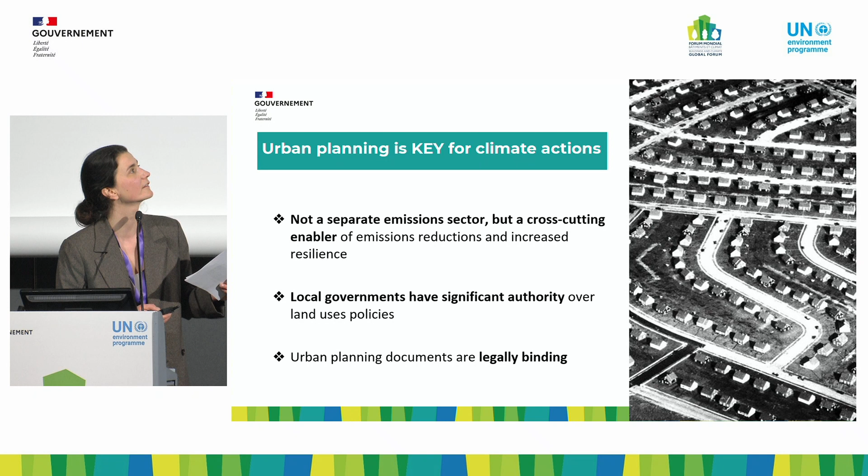I forgot to pass the slide. I don't think it worked actually.

As well as the characteristics of the building. So, for example, compact cities will de facto reduce the energy use of buildings and the embodied emissions from construction. There is a recent study from RMI that shows the impact on carbon emissions from this type of policies.

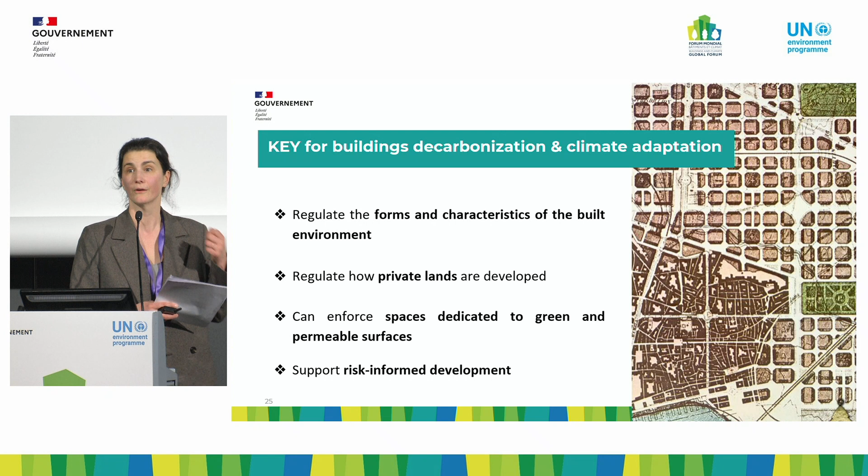Another example, we know that cities are made of approximately 30 to 40% of

I'm not good with slides today. Sorry, whatever.

30% of public space, and the rest is mostly privately owned land. So, of course, when we need to develop nature-based solutions and increase climate resilience, it's not possible to focus only on public space and open space. It is also very important that we regulate private development so they can also contribute to the important effort on nature-based solutions and climate adaptation.

Finally, we know that today, 90% of urban expansion in the global north and global south is happening in climate risk zones or near climate risk zones. So it is absolutely essential that cities and local governments get the spatial climate risk data that they need to take informed decisions when they are revising their urban planning policies and their master plans. So urban planning is key for climate action, key for building emissions, key for climate resilience.

And we know that the way we have planned our cities since the past century, since after World War II, is no longer working for the world. It promotes urban sprawl, low density development, and an over-specialization of land use and neighborhoods. It also promotes unsustainable building form and building characteristics. So it is urgent to change the way we plan our cities and to integrate carbon objectives, especially on buildings, and climate resilience.

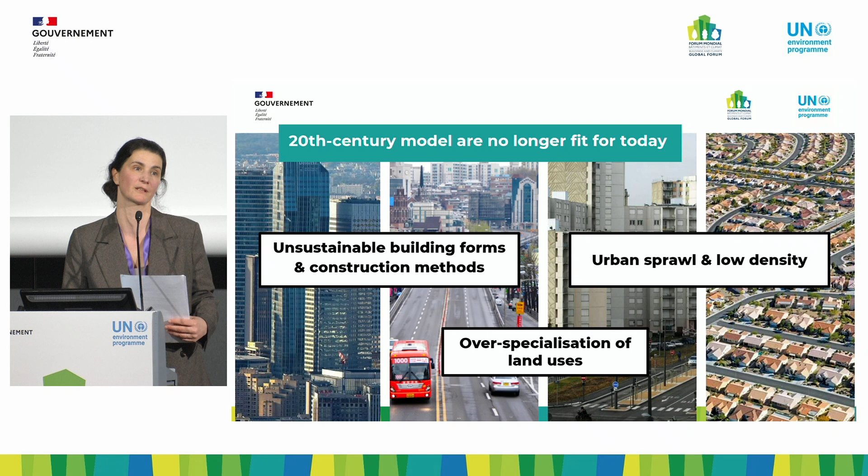So to open, our session today will be organized mainly around two panels. One about land use policies to decarbonize buildings, and the second panel about land use policies to accelerate climate resilience. Then we'll conclude our session with remarks from the representatives of France and UNEP, who will state the call for action that we have prepared with the organizations organizing this session: C40, where I'm the director of urban planning, as well as UN Habitat, UNEP,

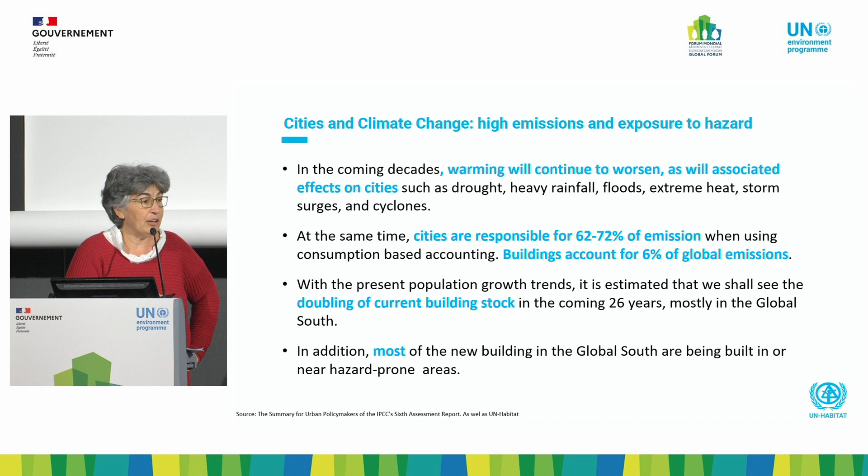Yes, just as a context, and I think Hélène has already mentioned some of these trends and issues related to both the hazard and increasing impact of climate on cities, but also the demographic trends that are making us face an exponential growth, not only of urban population, but of the space and the buildings that are requested to host them decently within cities, and also fundamentally the lack of good and well-organized planning and design of the cities, particularly in the global south.

I don't know where I have to. Yeah. Yes, it's a bit confusing.

So we are facing huge challenges, and we need a significant shift in urban planning. So it's not just a matter of putting urban planning in the center a little bit more when we talk about decarbonization and adaptation of cities and also of buildings, but also to be able to leverage adequate urban planning and design as an integrating tool, as well as system thinking that allows us to bring together different elements of influence on the built environment and the behaviors of residents and urban dwellers.

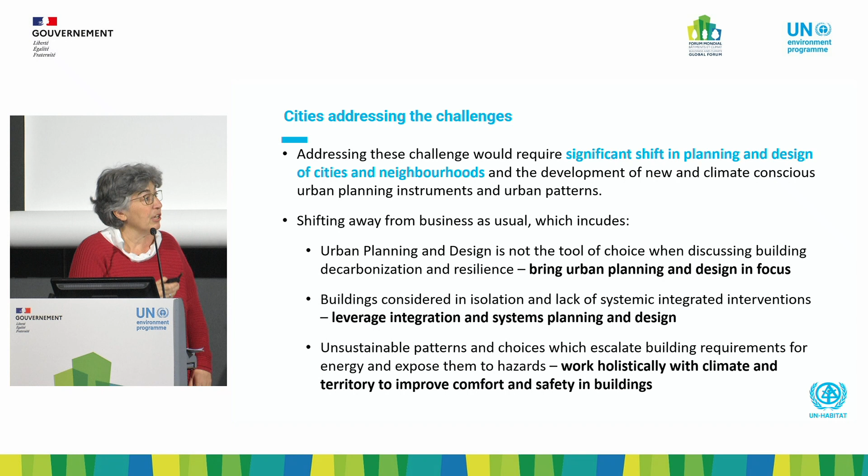And finally, we need to have a territorial and climate specific approach so that the conditions within even buildings are better influenced by the way we design and organize the space around them, at the neighborhood level mainly. So I just want to go through very rapidly what are the issues that we face and that we need to consider.

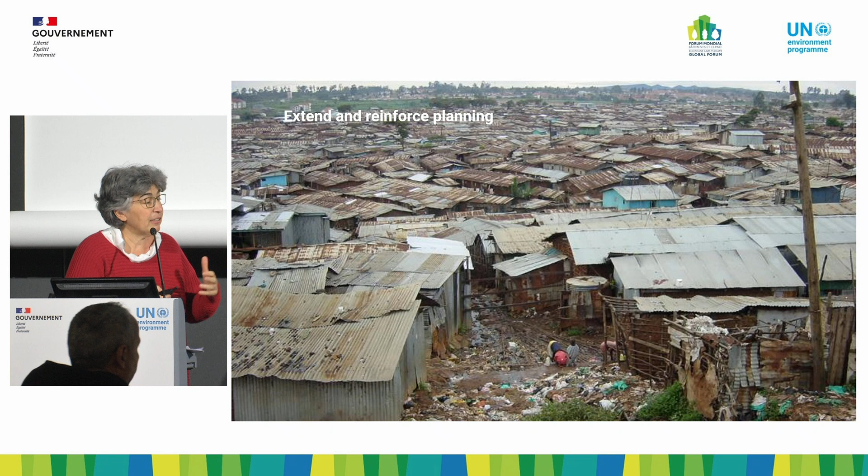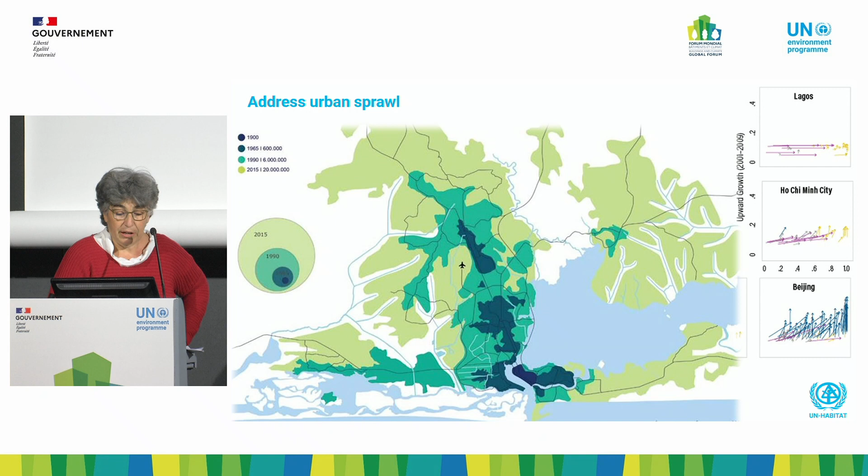First of all, urban planning and design tools and instruments are not extensively used and able to be implemented in many cities. This is an African informal settlement. So we need to extend the use and enforce the capacity. We need to address urban sprawl. It has been mentioned, but the growth of urban land uses is largely more than proportional to the growth of population, with a very horizontal expansion of many cities, and very few cities globally are actually expanding vertically. These are WRI studies, and the picture is from Lagos.

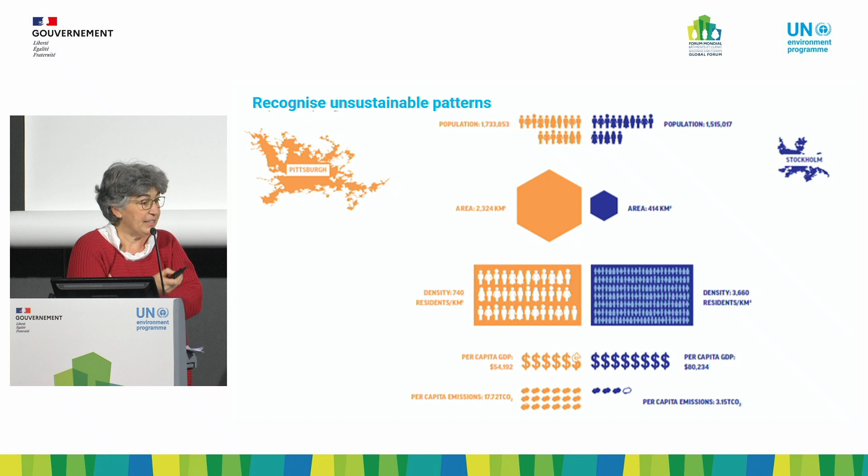We also have to recognize that certain patterns are less sustainable than others, and they have an embedded consumption of energy and request for carbon emission that is very specific to the patterns, particularly when we have low density and distributed settlements. We have here the comparison between Pittsburgh and Stockholm with similar GDP, actually even higher GDP in Stockholm; the amount of emission directly influenced by the actual pattern of low density in the city is quite striking.

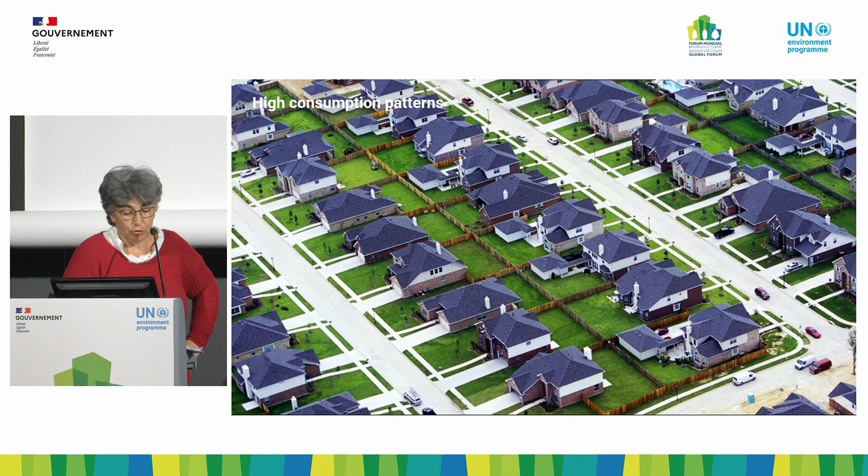This is also because we are not talking only about sprawl in poor cities or in low-income global south cities. We are also talking of high consumption patterns of sprawl, in particular in developed countries, where the preference often for single dwellings, etc., has a huge energy demand on top of, of course, land consumption demand, and this is just illustrative. So what about medium density and complex neighborhoods?

These are the patterns that have demonstrated the best outcome in terms of energy efficiency, both for the build but also for the overall use of energy for the functioning of these patterns. They support walkable cities and neighborhoods through mixed use and the proximity of functions, etc. But they also create a microclimate. And in particular, I wanted to mention the importance of deploying urban design tools and solutions, which improve the quality of the microclimate and mitigate, for instance, many of the requirements for cooling or warming within the buildings.

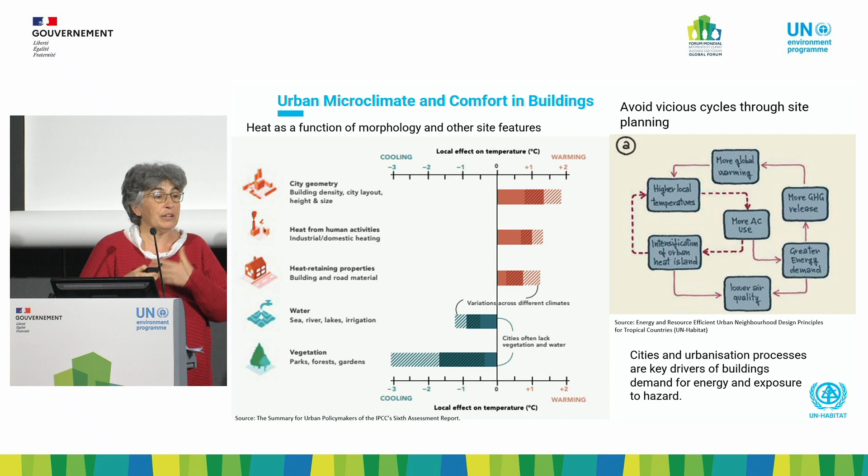Finally, there are quite a lot of studies on the vicious cycle of wrong design of neighborhoods, buildings and settlements in general, where the morphology and other site features have an important impact on local temperature, and all the discussion on the urban heat islands and how to mitigate them. And the example on the other side is the vicious cycle of using air conditioning and not being able to create more bioclimatic solutions. So at the neighborhood level, at the scale of the site, urban design is also particularly important. So not only urban planning, but also a more detailed design at the site level.

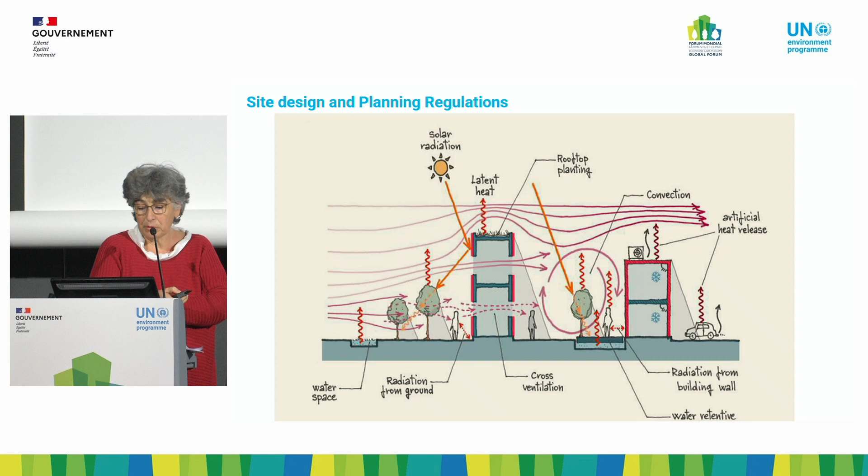And this is also very relevant for the planning regulation and the development regulation, the street patterns, the relation between the building and the open space that has been also mentioned. So do we have good planning and design that we can consider smart from a point of view of climate? I think what we have been working on as UN-Habitat and also the international community has been to promote what we call planning for a sustainable city, which works to revert urban sprawl to compactness, reduce segregation towards integration, and works against congestion through connectivity.

We have a number of tools globally which are being adopted also by member states to help us in this transition. I wanted to mention just a few. The international guidelines on urban and territorial planning, they are also mentioned in the New Urban Agenda as a reference for improving planning systems.

And this is referring to my first point on the need for stronger planning systems and better capacity. We, as UN Habitat, developed the five principles of sustainable neighborhood, which are about mixed land use, social mix, adequate density, limited land use specialization, and translated them into My Neighborhood guidance, which also looks at them in an integrated way, how they can support at different scales livable cities that are compact and connected.

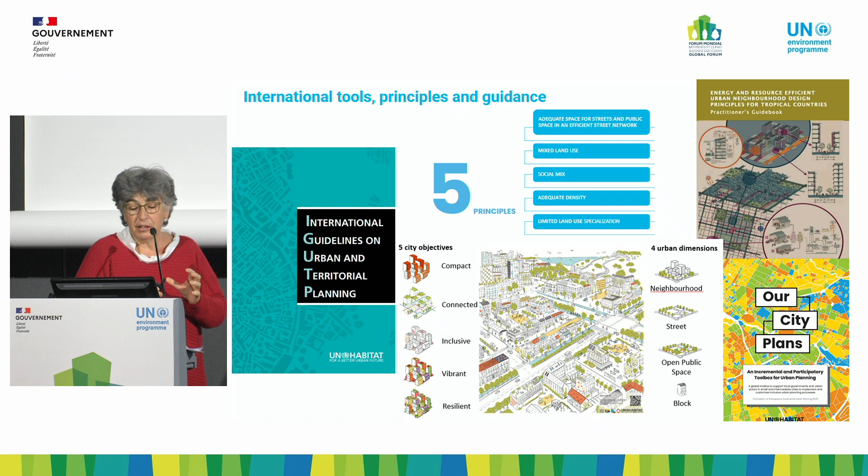And finally, we have worked on energy and resource-efficient urban neighborhood design principles, which go very much into the details of what needs to be done at the scale of the neighborhood on energy efficiency and resource efficiency. And everything needs to come together into planning that is actually recognized within municipal frameworks, and we have tried to develop support to that process through Our City Plans.

So I just talked about UN Habitat, but this is not an effort that is only, sorry, it's here. It's not only UN Habitat. Many organizations, cities, associations, and initiatives are active in this field. There is a wealth of knowledge, as has been mentioned, some research and practical experience.

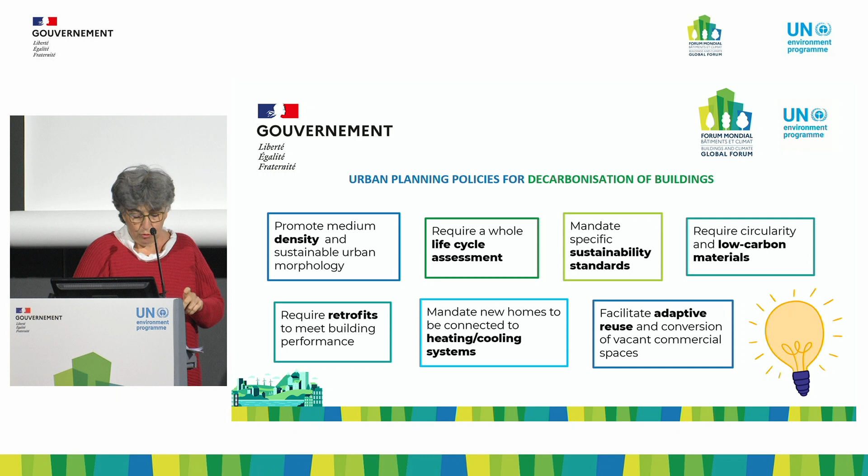But what we need now is actually translating this into a flow of resources, first of all, to cities, and capacities that enable them to be applied and reach out actually to the cities of the developing world, which absolutely need, given the patterns and the speed of their urban expansion, access to good practices and resources to be able to deal with these things. So I want to acknowledge all the partners that over time have been working on these issues.

Many will speak today, and also mention that this conversation moves from COP28, where we were actually discussing these issues as well, to some extent, decarbonisation through planning. We hope to influence the report on cities of the IPCC, which is a very important milestone for this conversation. And of course, COP28, 29 and 30 will be very important appointments for this community to continue this conversation. And I hope the discussion today will bring in even more inspiration and good practices in this direction. Thank you very much.

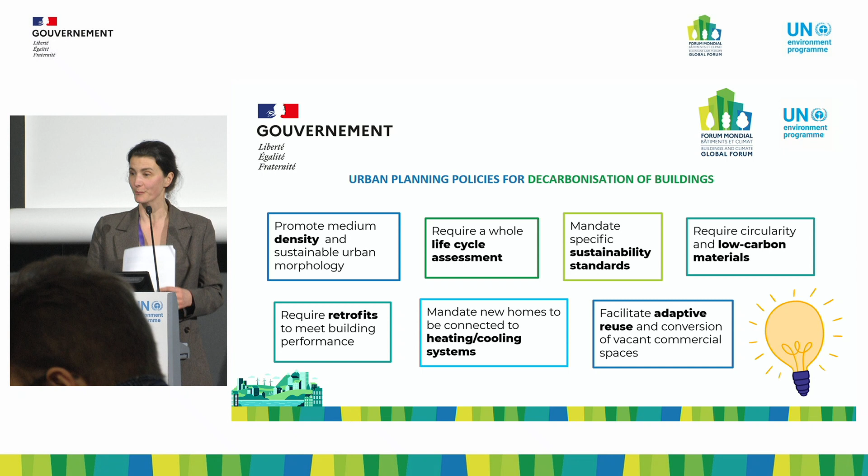Thank you very much, Laura. And actually, it's a fantastic transition to the panel and to the discussion we will try to have now. It's about how we make it happen. All the transformation, we know what needs to be done, how we make it happen. And let me maybe introduce the first panel. So we'll discuss land use policies for decarbonisation of buildings with a few examples of policies that cities have taken to reduce their emissions.

First, Portland in Oregon. The metropolitan area of Portland has just passed a new regulation that sets urban growth boundaries. And at the same time, the city has totally reversed its residential policies that had been developing urban sprawl and developed some facilities for infill policies and smaller housing units. Another example is the city of Vancouver, and the former mayor of Vancouver, who has been pushing this agenda, is in the room now, so I wanted to pay tribute. They have really included in their land use policies the need for integrating and submitting a whole life cycle assessment while developing their building permits.

The City of London has recently integrated in their land use policies facilitation and incentives for conversion of vacant offices and commercial space into housing. They have also identified areas where every new building needs to be connected to a communal heating and cooling system. And finally, the city of Medellin in Colombia has integrated a sustainable construction manual in the city's land use plan that provides advice, but also fiscal support for developers that apply circularity principles and low carbon materials. So these are just a few examples.

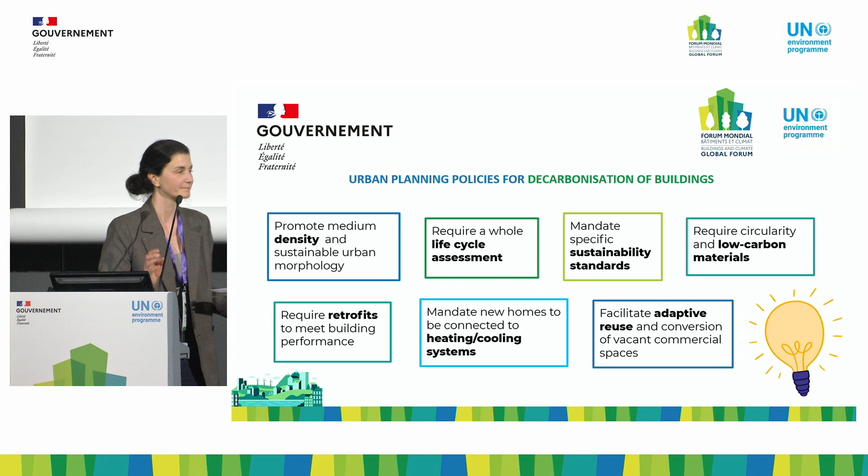Now let's dig a little bit more into the detail, and I'm happy to invite on stage Stéphane Leclerc, who is the director of urban planning of the city of Paris, Monica Conrad, who is the deputy director of the urban planning department of the city of Warsaw, Kelly Alvarez Doran, senior fellow at Architecture 2030, co-founder of Climate Design and professor at the University of Toronto, and Christian Hernandez, who is a member of the Executive Leadership Council of Urban Partners and Managing Partner at 2050. And actually, I think I will join you.

And Kelly, does that work?

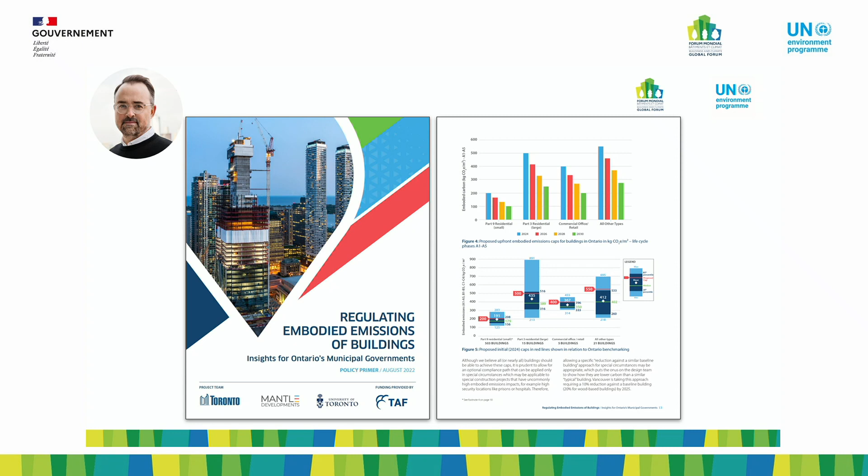Yes. So Kelly, my first question is actually for you. So you have been working closely with the City of Toronto to help them with their building decarbonisation strategy. You are co-author of the North American first embodied carbon target for cities. So could you please share with us a little bit how the urban planning policy of the City of Toronto has impacted embodied emissions and building emissions in the city, and maybe share with us some of the recommendations that you are actually discussing with them for the next amendment of their land use policies.

Absolutely, thank you, and great to follow Laura. So I'm a Canadian architect. I come from the highest GDP emissions per capita of G20 nations, and a lot of it has to do with our built environment. I'm co-author of this policy, the City of Toronto, the first, following Vancouver's footsteps, first city in North America with maximum targets. You can see we did an extensive benchmarking of building types to set these targets, and these targets will step down over the decade.

But in developing this, with the research that I've been leading at the University of Toronto, when you start digging into what does 500 kilograms per square meter really mean, you have to look deeper into buildings to understand where emissions live. And so here's an illustration of where the emissions live across residential structures in Toronto. You can see in low-rise stick frame construction, the majority is in the foundations. Even in the mid-rise and tall buildings, up to 50% of a building's emissions could be below grade, or I like to say our buildings are icebergs.

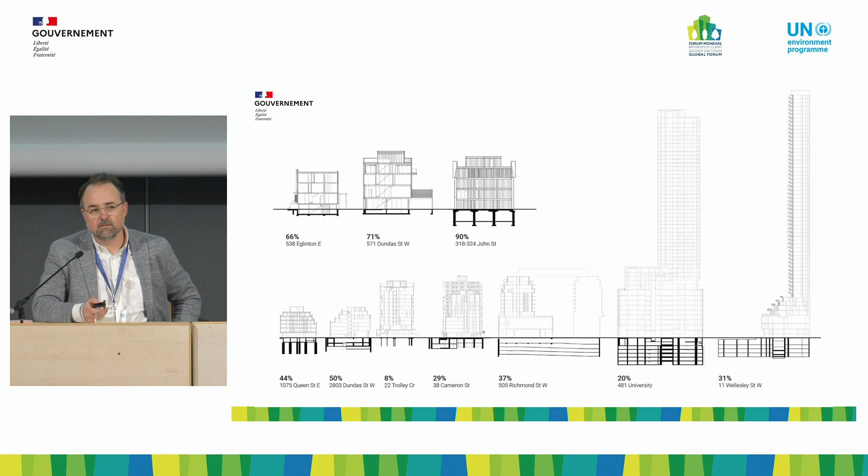And the question is why? Why is this happening? Well, there's primarily two reasons that are planning policies. I've come to understand that in Toronto, like much of North America, architects don't design buildings, planners do. And planning bylaw designs buildings, specifically the language in how we regulate what we can build. And so in the City of Toronto, there's exceptions, like these two that I've underlined, that are across North America and the world, which make building basements essentially a loophole in planning policy.

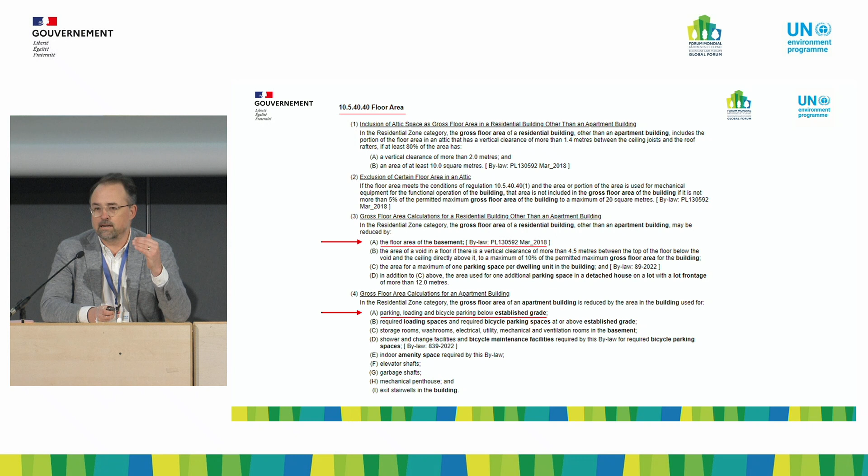So what the city is saying here is that you can build a basement because it's an exception in your coverage in any low-rise construction. And then if you're doing mid and tall buildings, we've got minimum parking requirements for you to fulfill. But don't worry, you can put them underground. We, urban design and planning, would prefer that parking is out of sight, out of mind. And so you see these incredibly deep holes that we fill cars with that are incredibly carbon intensive. And this is all the product of planning bylaw, planning language.

Now, after that, I'm currently working with the city to review the urban design guidelines for mid, tall, and low buildings. Many cities have these, basically very prescriptive means of how they describe new buildings. So this is evidence of the mid-rise guidelines, and what you can see here on the left are these angular planes, again, not unique to Toronto, worldwide. You see this phenomenon, these rear transition planes. First they wanted to ask, what would happen if we changed the dimensions around rear transition planes? And so we did case studies of real buildings.

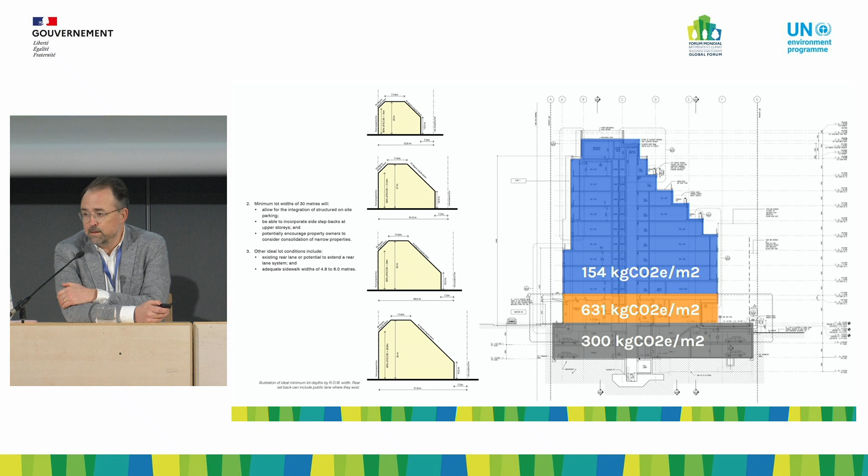So you can see here is a mid-rise housing building in Toronto, and you can see the allocation of embodied carbon across the section of the building. I'd ask, are we building parking or are we building housing? And we did these counterfactual studies. So if you went from a condition of this kind of wedding cake as a product of the setbacks to simpler forms, you can see that even controlling for reinforced concrete, there's big reductions.

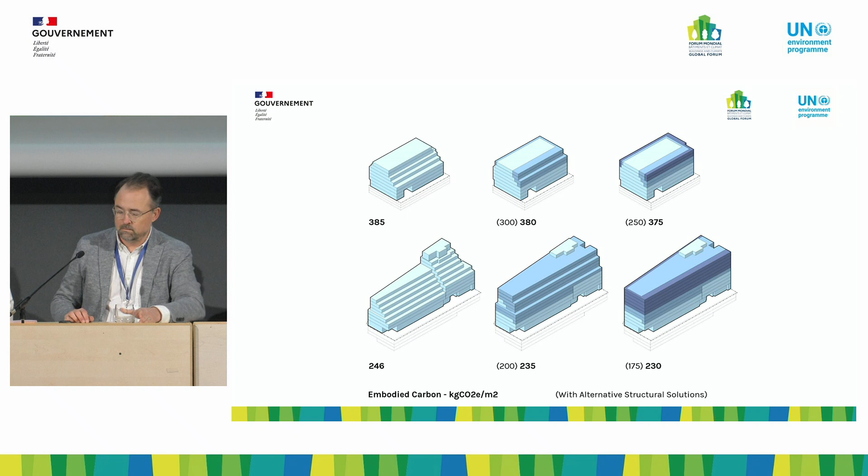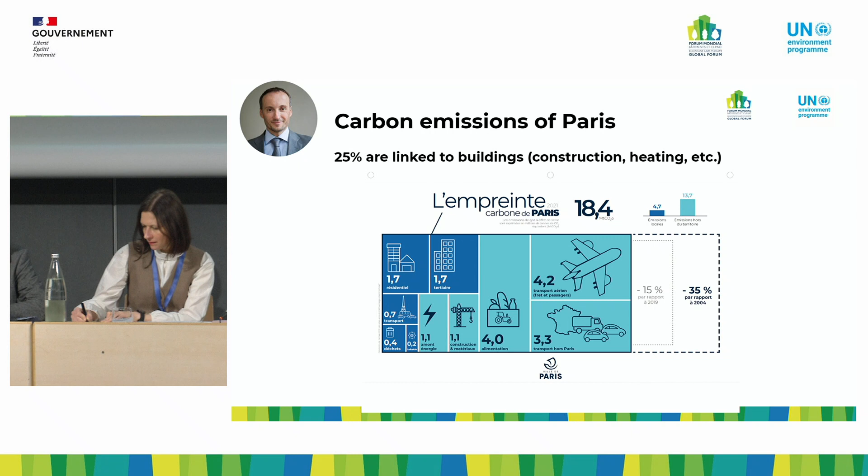And I think your point about the importance of the underground level and how they consume embodied emission was very, very important. I now turn over to Stéphane Leclerc. Paris is currently finalizing its new bioclimatic PLU, the French master plan, and how you have used this important document to integrate innovative new policies to tackle building emission. Could you please share a few ideas with us?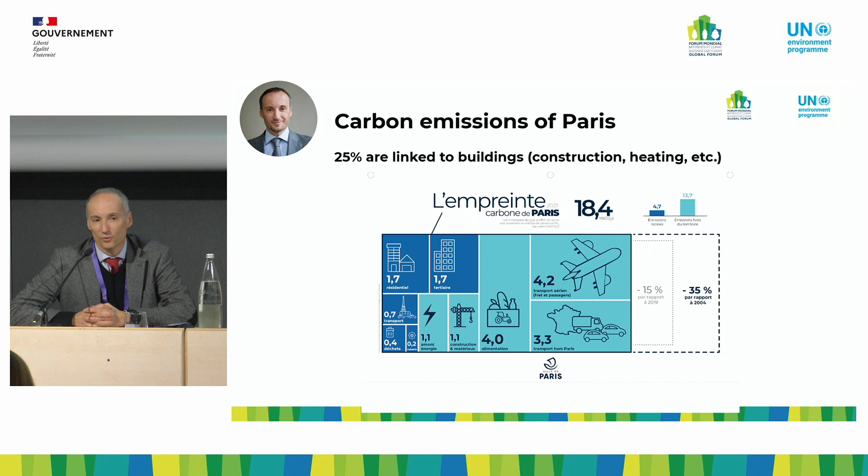Here you see the way we've already gone in Paris for a few years and the target. The target is very clear. It's the same for most cities in the world, most countries. It's carbon neutrality by 2050. And you see that we've made progress. A part of this progress comes from the mobility sector. You have perhaps noticed, if you just had a look at the streets of Paris, the real revolution that we have gone through the past years with, for example, bicycles.

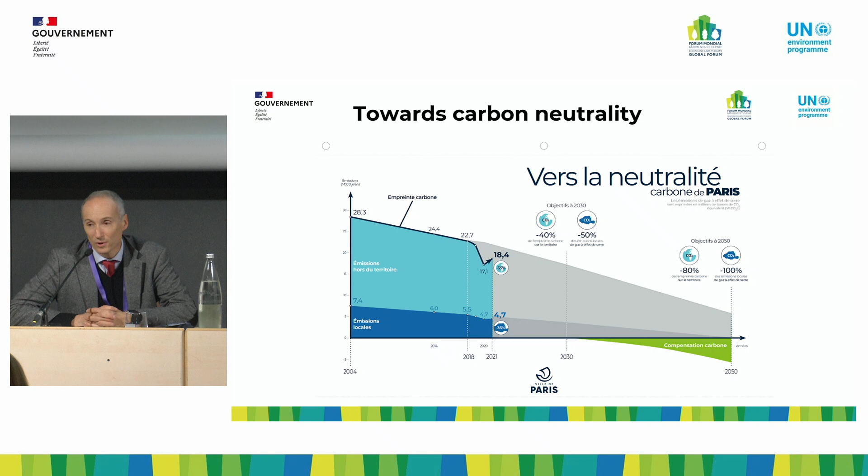We've more than doubled the number of bicycles in the streets of Paris. This is a result of a very ambitious policy to build bike lanes everywhere in the city to provide security for bicycles. We have a major public transport network which is very efficient, so that few people have the need to take their car in Paris. So this is one of the components, but we also tackle the issue of buildings, and you will see how we do that. The tool for that is, as Hélène mentioned, the bioclimatic master plan.

We have at the moment a land use plan in Paris, which dates back to 2006, and the mayor of Paris, Anne Hidalgo, wanted us to revise this document so that we set an international example of how a big, attractive, dense city such as Paris can show the way and be at the level of what the Paris Agreement of 2015, COP21, set to drastically reduce carbon emissions. So how do we do this in Paris, which is already a nearly totally built, very mineral city?

The first key strategy is to change the paradigm of a land use plan. Usually, a land use plan defines how you can build. In the future, in Paris, we will build very, very little. The main aim is to do with the existing buildings, to see how we can transform them, to avoid demolition. Demolition is very intensive in terms of carbon, and to transform the buildings so that they can have new lives without having to spend a lot of carbon. I will show a few illustrations after that.

The second key element is to accelerate the thermal insulation of existing buildings. Depending on the periods when the buildings were constructed, their thermal efficiency can be very different. We have what we call in French passoire thermique. I don't know how you would define this in English, but buildings where the heat goes through the walls and the cold comes from the exterior. So we have to be much more ambitious, to go much quicker.

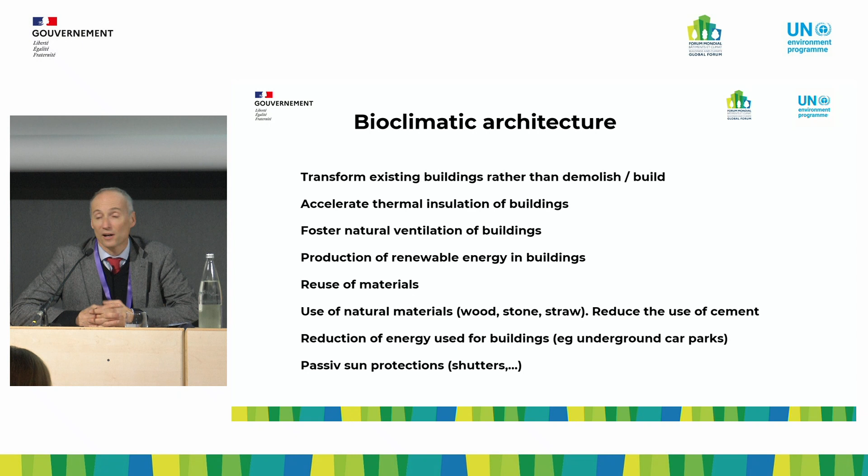And lastly, we have to reinvent some old traditional techniques which were used in the past. So, for example, shutters on buildings. There is nothing more efficient to prevent you from heating than preventing the sun from going into the building through the window. So this is something very archaic, but it's very efficient. It's much more efficient than having air conditioning, which uses energy as well. So all that is at the heart of the new bioclimatic urban plan.

A few illustrations to finish. As I mentioned, the new paradigm: don't demolish, don't build. Do with what exists. Most buildings, if they are built in a proper way, can have centuries of life. Maybe some of them millennia of life. We still have Greek temples in Greece, so why don't we have buildings that we built for centuries in front of us? These buildings can have several lives. They can have accommodation, and then in the future they can welcome, I don't know, shops. They can have doctors' offices, etc.

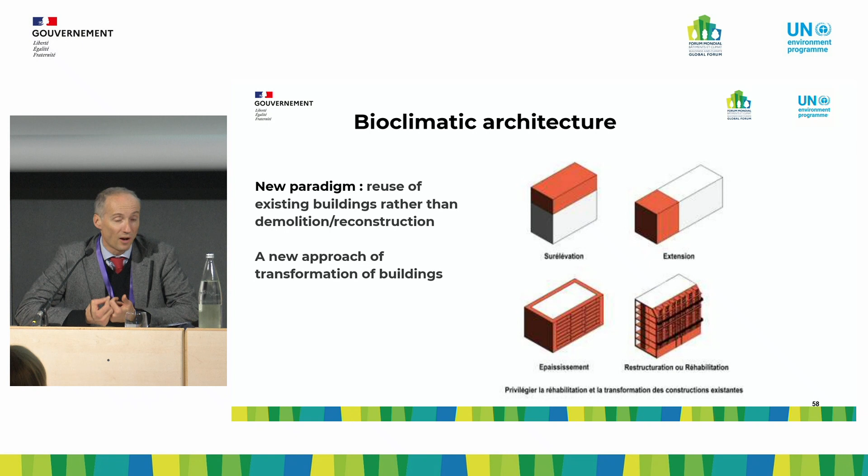You have to think of key rules to achieve that. How do you transform the buildings? For example, we can raise their number of stories. We can elevate them. You can extend them. You can add some exterior extensions to provide, for example, balconies, which are very pleasant for the people living in buildings to have a little place outside of their home, which is very important when you live in dense areas such as Paris, where you don't have a garden. So all these tools are very easy to implement, provided that you have the political ambition to do that.

It's easier to transform buildings which are transformable, of course. That leads to the question of reversibility of buildings. We know that some construction techniques are easier to transform. That's the question of post and beam framework instead of concrete walls, which are very difficult to transform. So the more the buildings are reversible, transformable, the longer they can live, and the less energy you have to spend to transform them.

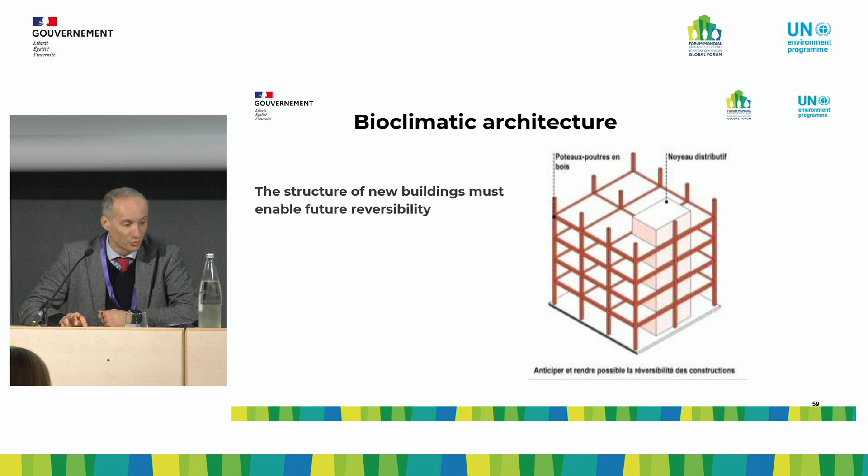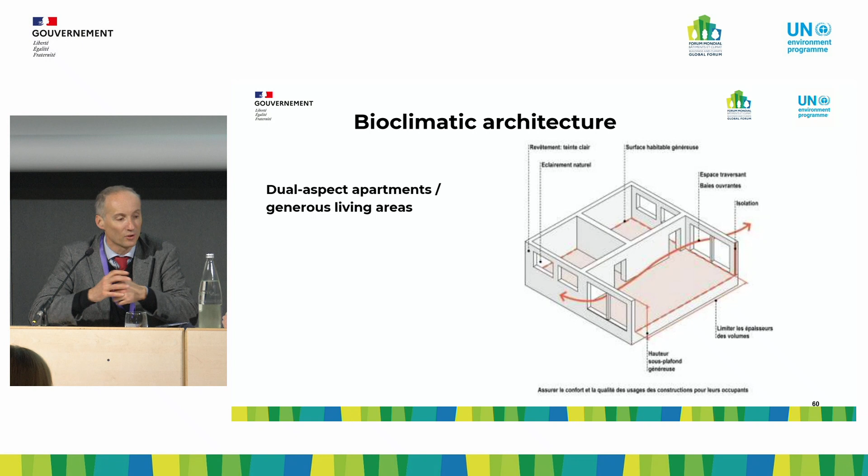You also have to think of very basic things, such as providing natural ventilation in buildings. If you have double orientation, dual aspect apartments, you can have one side of the apartment which opens on the north side of the building, where the air is cooler in the night, where the sun doesn't come, and you can provide natural ventilation without using energy once again. So all this goes in the same direction.

And lastly, this is an example of the kinds of buildings which we want to promote now in Paris. I spoke of wood, stone, straw, and it's actually very easy to build some dense buildings in wood. Our ancestors did this for centuries. It was normal at the time. So why don't we come back to such techniques which can provide very low carbon emission cities?

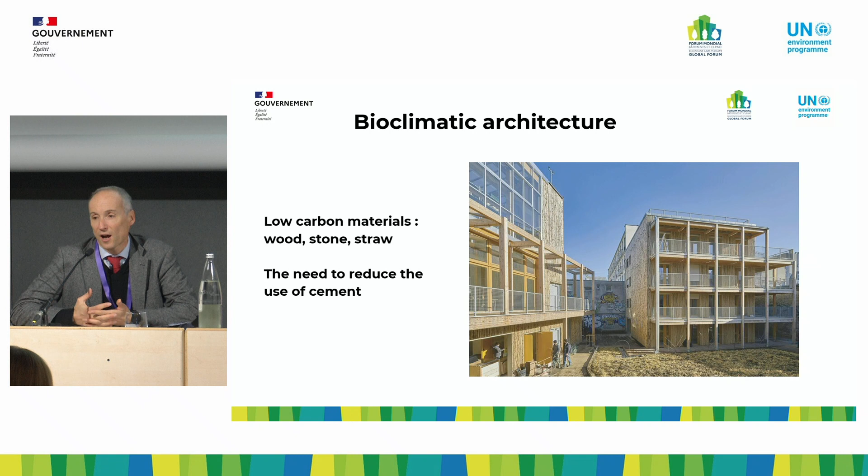Thank you very much, Stéphane. What is very interesting in what you say is that these good principles, I think we share. The real matter is how we mainstream them, how we put them in legally binding documents. And the work you have done with the new PLU of Paris, with the political support, as you say, I think is in that sense very transformative.

It's not one example of a project. All of the new projects in Paris will have to integrate this very important policy. And that's why at C40, we really think now the idea is to mainstream, how we make these general. We have been, all of us, in a lot of conferences where we show great examples of projects. The real topic is how we transpose them into legally binding policies. And this is why urban planning and land use policies are so important.

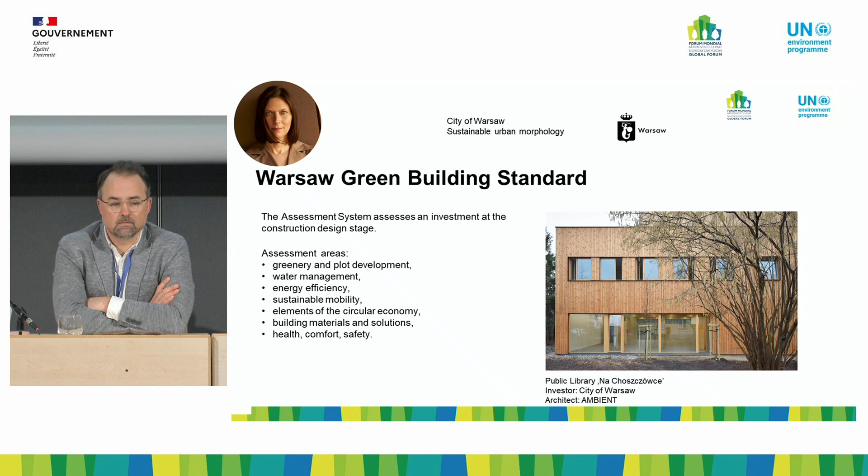Monica, thank you very much for coming from Warsaw to be with us. So the city of Warsaw is now working on sustainable urban morphology guidance and policies. Could you please tell us a little bit more about this approach? Yes, indeed, we do work on the strategic master plan that we hope is going to be bioclimatic. We do everything to achieve it.

But I will start from another scale, the building. The success of the energy transition at the local level depends on the action of municipal authorities. That's how it actually is coming. And what we're trying to do at the moment is to introduce a set of standards. So what we see on the picture is the Warsaw Green Building Standard. That is just a starting point.

We are developing it to be implemented only for the municipal buildings at the beginning. The next step will be to encourage developers to use the same standards. They are pretty high. They are higher than any regulations. So we know that actually we have a lot of discussion because I think next month it is going to be announced. And will we actually afford to build? But we have to do it. It's just necessary to make a step forward and to give a good example.

So we have certain categories. You could see that it's not only the building, it's also the surrounding areas. So a plot level. What is very important for us is the greenery and plot development. And here we are introducing a biotope area indicator that depends on the surface where it's used. We are actually inspired by Berlin standards. However, I know from Berlin how costly it is to implement it. So we know that there will be a lot of challenges, and we are ready to adapt it.

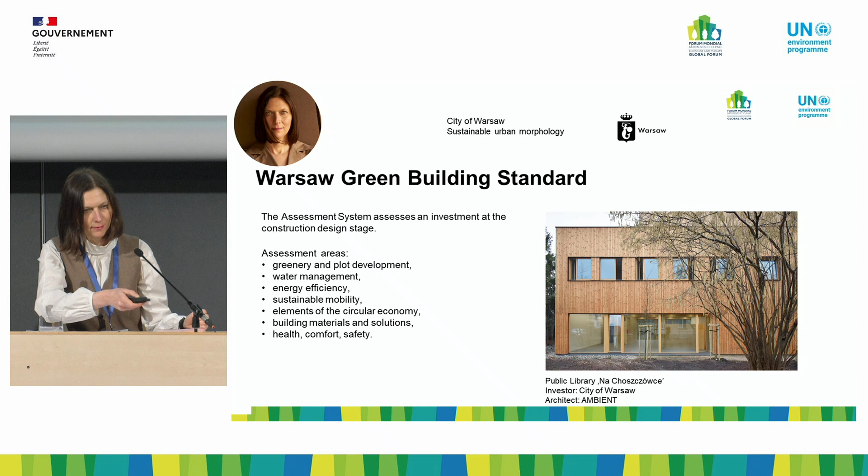Oh yeah, here is the... This is a challenge. Yes. Here we are. Here we are.

So, we're talking about the strategic level. And on the strategic level, we are developing an urban planning policy where we will set rules to develop a resilient living environment. And we'd like to do it in the form of requirements for existing and new urban fabric. So the starting point was the examination of the existing city structure. We evaluated it in order to develop quality of life.

So what you could see here on the picture is just two types of indicators, floor area ratio and biologically active surface ratio. We examined a lot of them, to see what we are missing at the moment. Warsaw is a polycentric city with a lot of different characters of urban morphology. But the biggest problem is actually urban sprawl. That's the biggest problem. And sometimes we do not have any greenery in the city center.

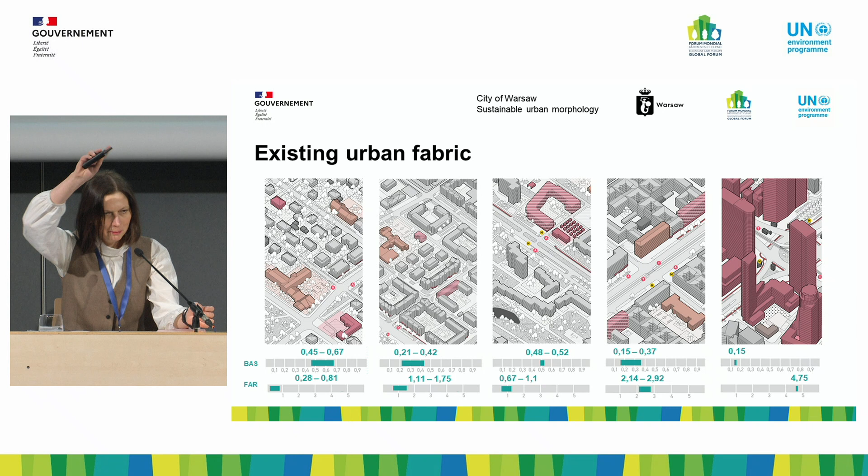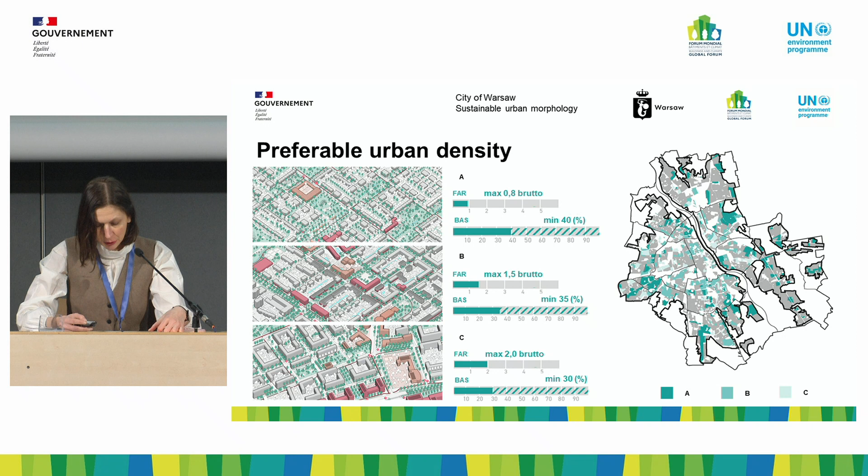The city developed very rapidly with actually a lack of regulations. So that's why we are suffering at the moment, and now we have to have very strict rules. So by introducing desirable types of morphology for new development into existing gaps in the already built environment and in brownfields, because it's important how the city is going to grow, we will reduce building and transportation emissions. That's the plan. And in this way, we are going to improve the quality of life.

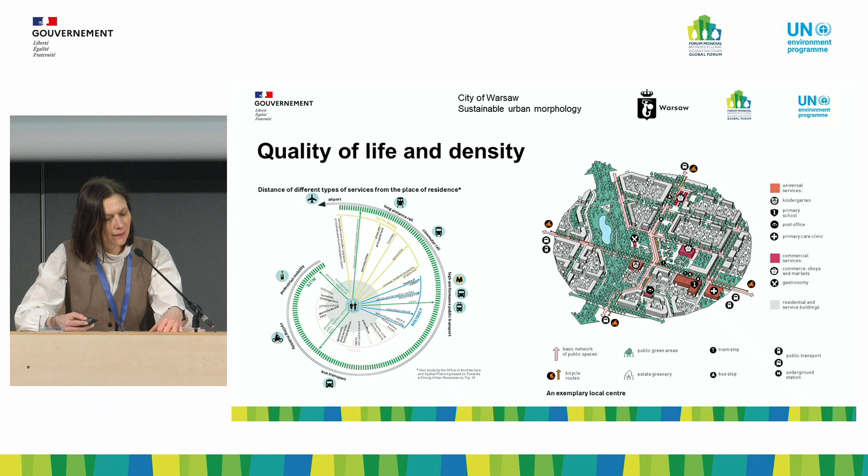No matter what is the desired density and how to implement, that's what we are still checking. And we know that the ratio that I was showing in the previous slide, that is biologically active surface, is very important. And we know that mid-rise density is the one that we really desire. But we do have already neighborhoods that reach this density. How we are actually changing them, that's the question.

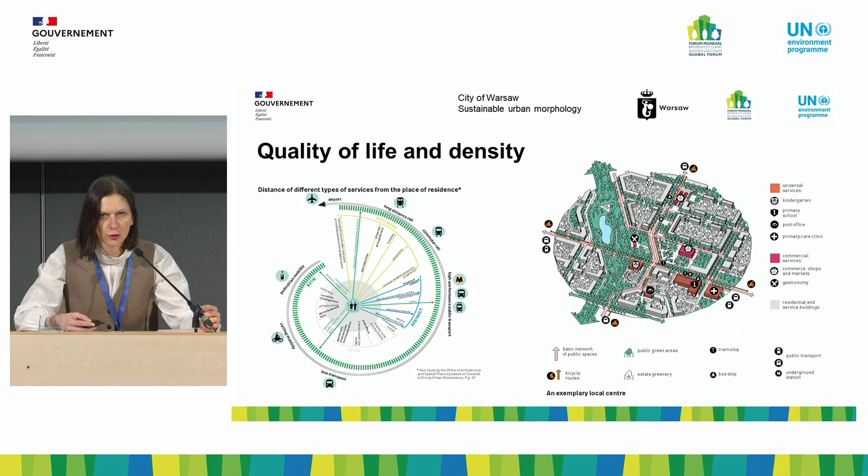We should not build new buildings where we are searching for new areas, and how to actually make a network of neighborhoods that are connected together. And here we are going to the network of open spaces that are interlinked with public transport and blue and green infrastructure to, in the end, create an environment that we call urban ecosystem, so that in the future we actually can ensure that the urban tissue of Warsaw will be resilient.

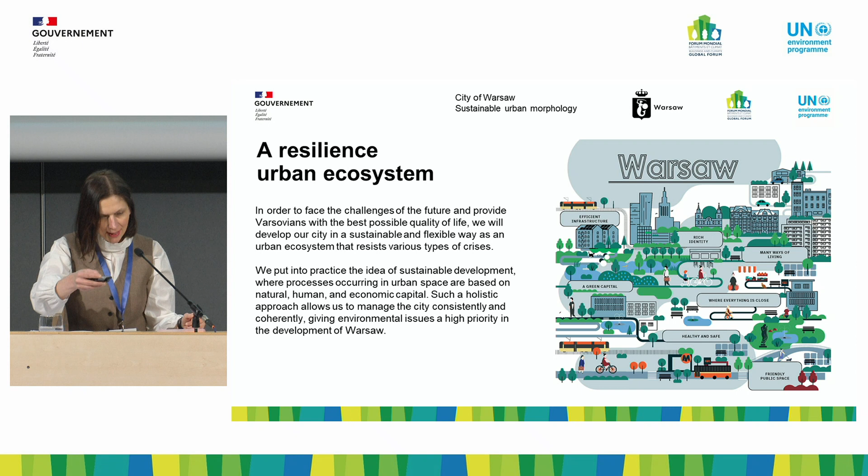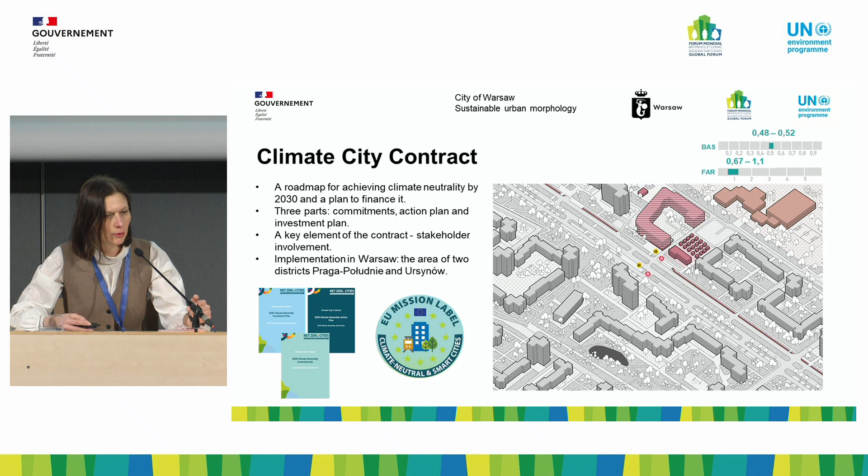So I just have last slide. We are talking about the vision. We already have climate policy in Warsaw. It's called Warsaw Green Vision. And first step was to introduce building standard, green building standard. And next step is going to introduce climate city contracts, which is actually now happening for 2 districts.

Thank you very much. Thank you very much, Monica. This is very interesting how you see the vision of the cities and where you can build, when you can develop these desirable densities and see the cities as an ecosystem and not just an addition of buildings. I have a follow-up question for you, Kelly, before we move to you. For each of you, actually.

So you were saying that you were working with the city of Toronto. So in line with this work, what are the key few land use policies that you think are the most impactful in terms of embodied emission, especially? Yeah, a few, and evidence that they're already happening. One, remove parking minimums. We have got to make parking not the problem of a building to solve, and moreover, we need to be decoupling our built environment from cars. So I think that is something any municipality should be doing right now, get rid of minimums.

2, the definition of floor area, even in the FAR coverage. I'd be very curious to know how basement area is part of that or not. We need to make all floor area part of the calculation. There should be no exceptions, and there's parts of the world, I used to live in Kigali, Rwanda, where all floor area should be considered floor area.

And 3, I think there needs to be a full-scale review of the assumptions of what makes good cities. Things like angular planes need to be reviewed in light of, I think, everything we just saw, including Laura. I think we live with a kind of baggage of ideas of what made good cities, and I think what we see now is there's a lot of unintended consequences in what we deemed good urban design that requires a really thorough review and to move forward potentially without much of it.

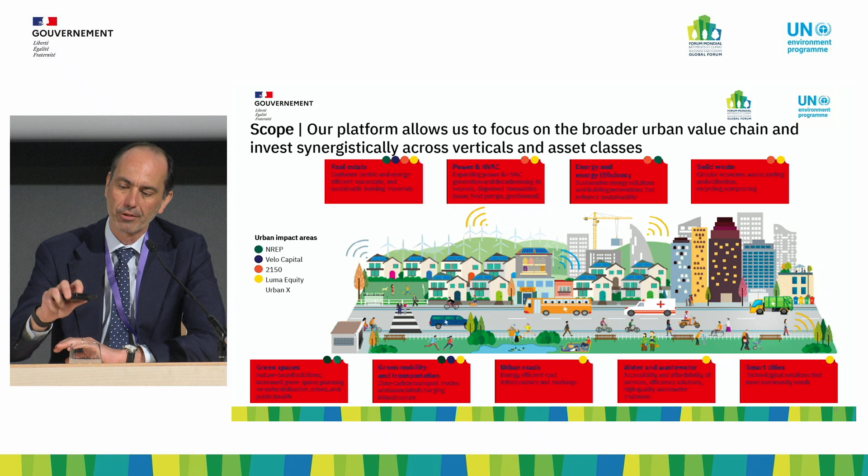And we're doing it at scale already. This is not a building here and a building there in Stockholm or Munich or a logistics center in Poland. We are building at a zip code level scale.

So the first project that we did in Copenhagen is called Nordhavn, which Forbes magazine called the most sustainable neighborhood in the world. It was an old Maersk shipping port that's been completely transformed into residential, shopping, there's a school, financial institutions. It's a new, vibrant neighborhood, literally in the middle of Copenhagen. Zip code, by the way, 2150, which is where my venture capital name comes from. And this is actually like a vibrant center.

And it's really interesting how we partnered with the city of Copenhagen, who actually owned the land, with financial partners to actually scale it out. Urban Partners itself did not build that many buildings. It was other people that built the majority of the buildings. We were the master planner behind the project. And the one thing that we kept was the right to decide what went on the ground floor of every single building.

And we have a guy, it actually is a guy, that goes around curating what restaurant's going to go there, what supermarket's going to go there, what flower shop's going to go in the corner, ensuring that the social fabric is integrated into the financial project of a real estate development at city scale.

We have a new project also starting in Copenhagen called the Railway District. It's a massive amount of land, very similar to King's Cross in London, in the middle of Copenhagen, that'll get redeveloped, 500,000 square meters, into residential and commercial, with social aspects to it. So we want to apply this knowledge, these problem solutions at a big scale, right? Not just building by building, but actually at city level scale.

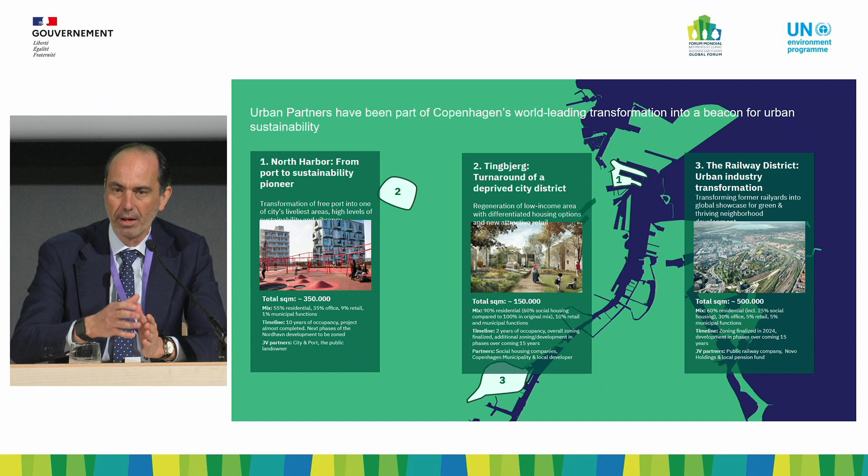And that's where Ellen comes in, and our partnership with C40, which we announced 2 years ago now on the Green Thriving Neighborhoods program, where C40, through their network of mayors around the world and urban partners, through our knowledge and experience, having done this at scale, can go help mayors make the decisions, identify solutions, and implement these programs and pilots in their own cities.

We have no financial incentive from this. We actually really just want to tell the rest of the world how we've done it and how you can do it at scale, and by the way, make a lot of money doing it. And so thank you to C40 for the amazing work you've done with us on helping to tell others, and actually the invitation and convocation to be here today.

Thank you, Christian. And today we are developing through this program more than 22 pilots all across the world, global south, global north, to help to think how we plan the city at the neighborhood level. Laura was mentioning that, and we are partnering also with UN Habitat on this. And we have a network of many cities, more than 50, who are following this work very actively.

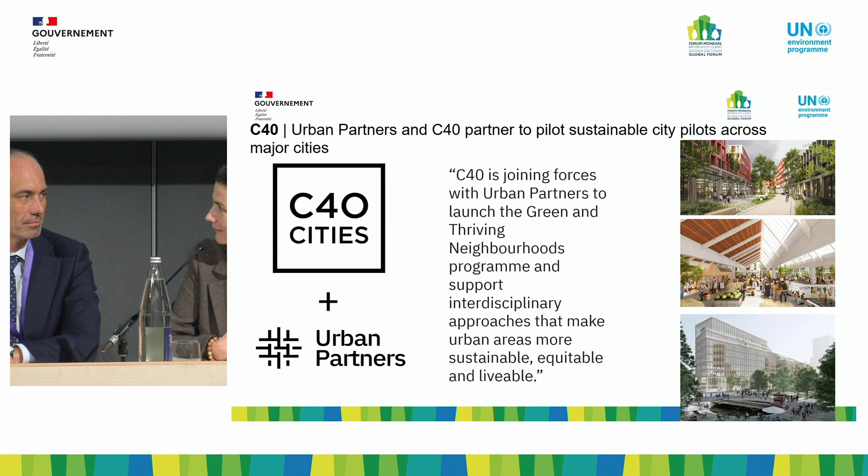I have a follow-up question for you, a little bit a form of reaction to what you heard from the city. How, as a developer, as a pioneer developer, if I can say, do you react to cities who are raising the bar? Is that good news? And what also do you see as a potential impact on your business, and how you could maybe advise a little bit the cities on how they could better collaborate with the business sector to accelerate, to advance this agenda with you?

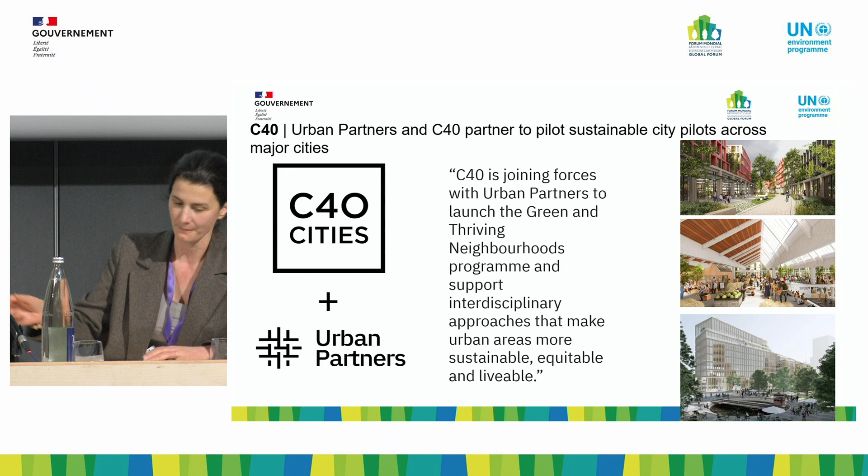I think the challenge here is the city, right? So take Germany, right? The rules of how to play in Germany are going to vary city by city. And if you're developing projects across the whole country, how do you actually normalize for what is the best practice? It's not going to happen that all the cities are going to have the same rules, but at least having best practice, I think C40 is well positioned to actually do that. Like the Paris plan, how can that get replicated across cities?

We need consistency to be able to make investment decisions, especially at scale like this. These are 20-year projects for urban redevelopment. If we don't have consistency and certainty that the rules will be the same throughout the life of the project, the business case falls apart. And it's also an ability for us as the industry to come back to the city and to the regulators with our own vision of what's possible.

So we are sponsors of an initiative called Leaders of the Urban Future, which is about $500 billion of real estate assets, BlackRock, GIC, Ivanhoe, Cambridge, and us, defining what we believe a net zero building looks like, and coming back to regulators with the blueprint of what that could look like, to try to educate them on what solutions might be. And then hopefully encourage them to adopt some of those. So consistency and long-term visibility, I think, is a critical part.

Very similar to what Stefan said, actually, about the need to set the vision and to make sure that there is a form of consistency in that. Thank you very much to all of you for this discussion. The second panel, thank you very much.

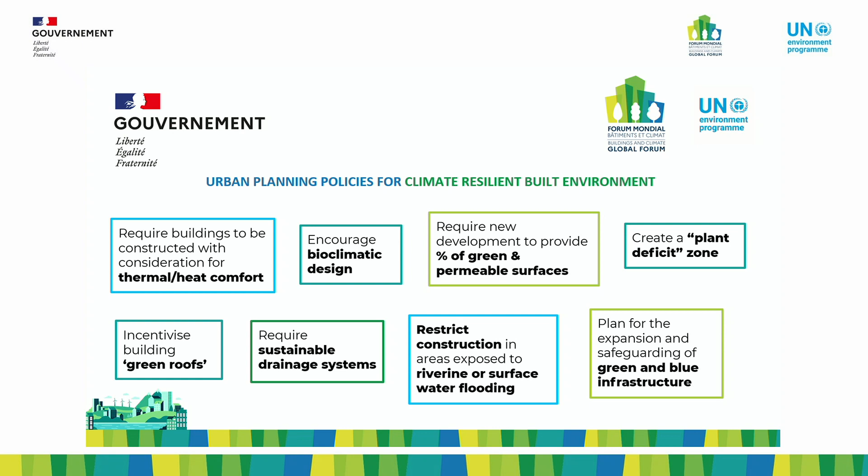The second panel will focus on land use policies to accelerate climate resilience. So we know that it's also a very important tool to mainstream climate resilience, not only through street open space, but also through each of the development of the cities. There are cities who are already doing that. São Paulo in Brazil has developed an environmental quota that requires every new development, every major regeneration to incorporate a percentage of green space, to incorporate a percentage of permeable soil. If a developer exceeds that, they will get some fiscal incentive.

The city of Philadelphia has developed a specific zoning code to regulate land use activity in the flood plain, and they have published a very comprehensive guide on how we develop around or next to this flood plain. Toronto has developed a green roof bylaw, a form of graduated green roof requirement for development and major regeneration. I could continue like that a lot. Cities are taking action, they are taking new policies, and that's what matters.

So now, to go a little bit more in the detail of this discussion, I would like to invite on stage Cléa Daridan, who is a senior curator at Community Jameel. Cléa, thank you for joining us. Brigitte Bariol, who is the director of the FNAU, the Federation of the French Urbanism Agencies, and Gadir Almoud, who is the deputy city manager for planning and economic development of the city of Amman in Jordan.

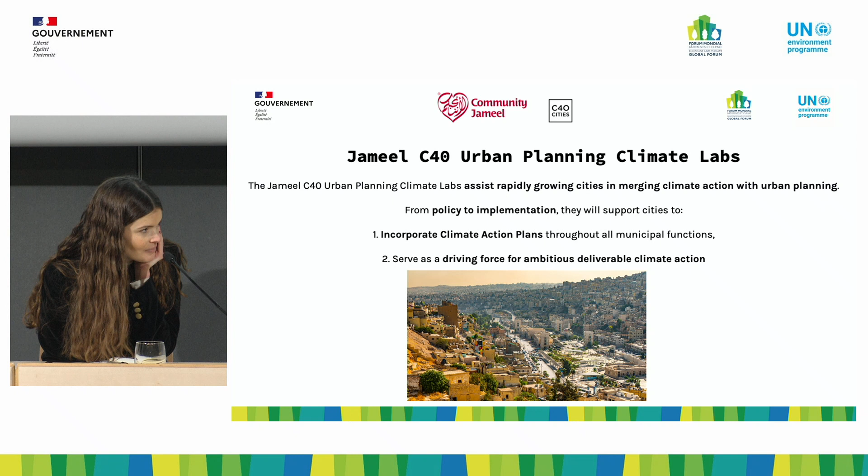A lot to do. We are also supporting the other cities of the region, but the very specific program we are starting in Southeast Asia, I think it's exactly what needs to be done. Now, I'm very happy to thank you very much, Brigitte and Clea.

I'm very happy to invite on stage Dr. Abdelkhalek Ibrahim, who is the Assistant Minister for Technical Affairs, the Ministry of Housing, Utilities and Urban Communities of Egypt, and Sharon Gil, who is a manager at the Cities Unit of UNEP. Both of them will wrap up this session and share with you the call to action that the organizations who have prepared this session have prepared to ask that urban planning is integrated in the Buildings Breakthrough and the Global ABC agenda. And I hope you are now convinced about it. Thank you very much.

Hello, hello everyone. I'm sure you're all very hungry right now, so we're going to keep this short. And cold, Ibrahim is saying.

We're going to keep this a little bit casual at this point, and I wanted to pose a few questions to Ibrahim. We heard quite a bit from the speakers in the room, and the many good examples from the cities in this session. What do you think are the key takeaways that we all need to remember from the two panels? Okay, thank you for inviting us to this interesting and comprehensive session. I would like to be very focused because we are behind time. We have some reactions or some similar agreement on some points I would like to share.